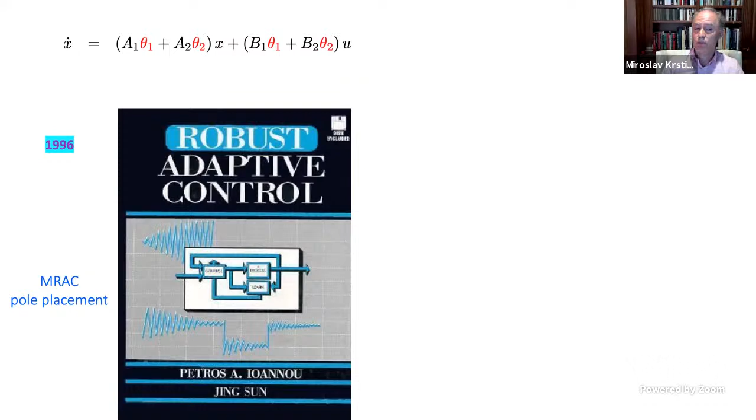Roughly, and I'm really simplifying things, for systems that are linear in X and linear also in the parameters theta. This book appeared in 1996, and roughly speaking, you will learn there methods like model reference adaptive control, pole placement, also adaptive LQR, and other methods.

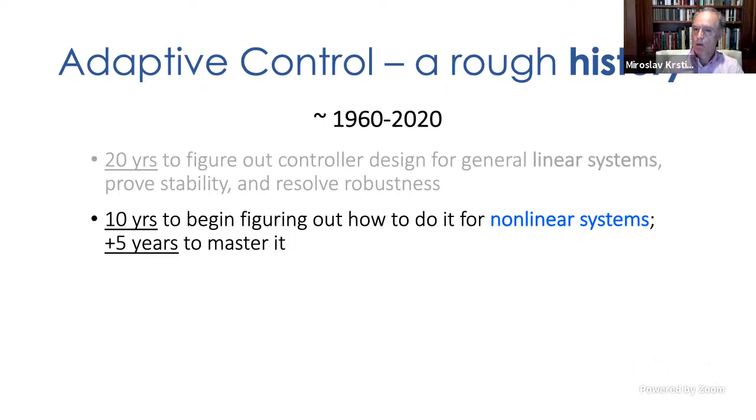The next 10 years, the 1980s, were spent figuring out how to do adaptive control for nonlinear systems. And the following 5 years, roughly the first half of the 1990s, was spent mastering adaptive control of nonlinear systems. That area was launched with this book.

And you see that the difference here is that while the system remains linear in the parameter, it is no longer linear in the state variable X. This book remains incredibly popular to this day with 11,000 citations. There's only one more highly cited research monograph in the control field, and that is Steve Boyd's LMI book.

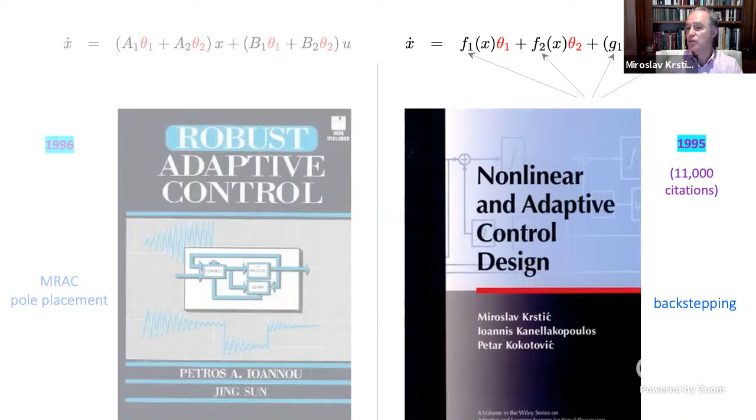The methods you get to learn from this book are methods related to backstepping. And then after this book, focus was placed on developing neural network versions of those methods, namely studying problems where the nonlinearities are not necessarily so simply linearly parameterized, but are more unstructured.

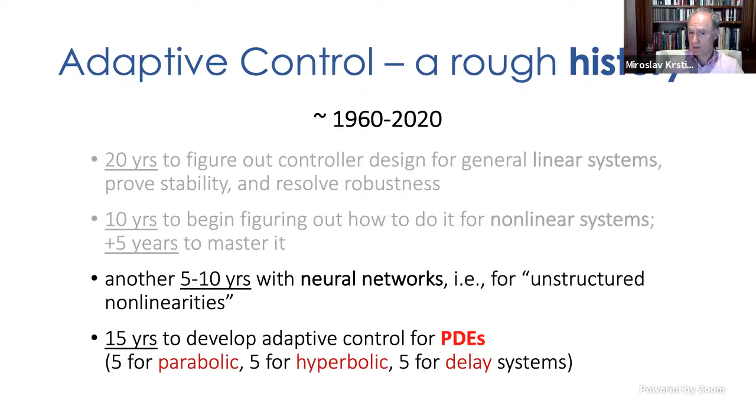Delay systems, by the way, are a hybrid class of infinite dimensional systems that includes transport, hyperbolic PDEs, and ordinary differential equations. There are many, many lessons that the adaptive control people have learned the hard way over the first 30 years and continue to struggle with over the subsequent 30 years. And I will emphasize 3 of them. Some of them are extremely basic, but still even from those, there is something to learn.

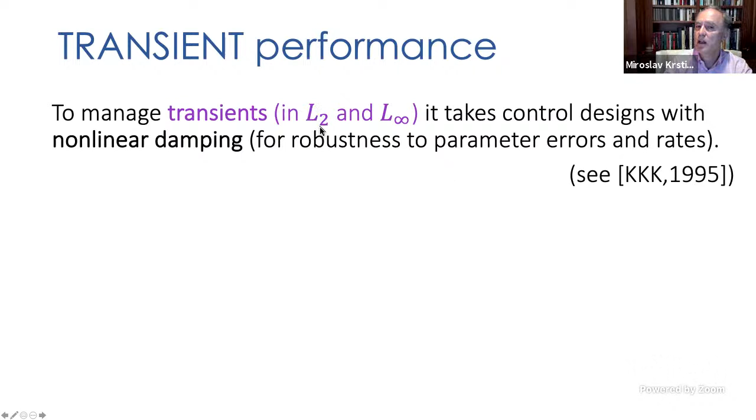You cannot achieve this with model reference adaptive control. You cannot achieve it with pole placement and so on. It's become achievable by the use essentially of nonlinear augmentations of the baseline controllers. And the first such results are in papers that precede this book that I mentioned earlier. So the transient guarantees come in the form of L2 and L-infinity bounds.

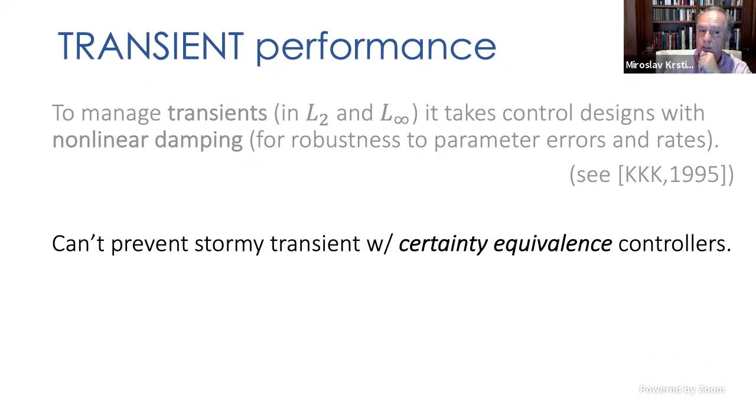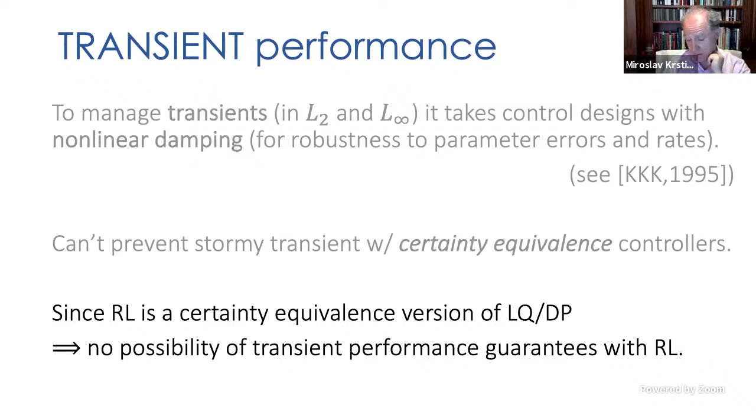Certainty equivalence controllers, namely just adaptive copies of classical non-adaptive controllers, cannot guarantee desirable adaptive transient performance. And since adaptive dynamic programming or reinforcement learning is a certainty equivalence version of LQR, there is no possibility of having such guarantees with those methods. Be prepared for a user to demand it, but that you will not be able to furnish.

Finally, optimality. So why is this relevant? Well, because adaptive dynamic programming is an asymptotically optimal learning approach. It is called adaptive dynamic programming. It is an adaptive form of optimal control. Sometimes when terminology includes two adjectives, people commute them. Adaptive optimal control, optimal adaptive control, who cares, right? Well, actually, there's a big difference.

The first phrase means that it's an optimal method that is made adaptive, and it's optimal asymptotically as time goes to infinity. Optimal adaptive control is an adaptive control method that is optimal over the entire time horizon. It is truly optimal from 0 to time infinity. Does such a method exist, since adaptive dynamic programming certainly is not that? Can the second thing, optimal adaptive control, be achieved?

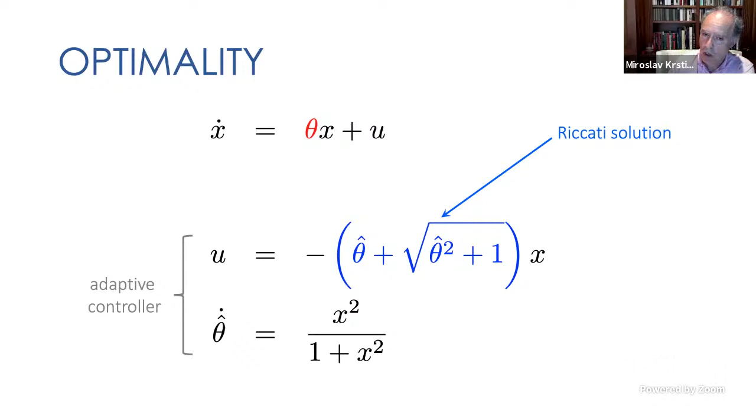Now here's a result that takes a little bit of proving. That control law happens to be the minimizer of this cost functional. Take a look at it. It's a bit unusual in two ways. First, the sum of the squares of the plant state and of the input are divided by this Riccati solution, which is fine because this quantity is positive. It's not constant, but it is positive. The second thing that is far more unusual is that there's a weight that is exponential in the parameter error.

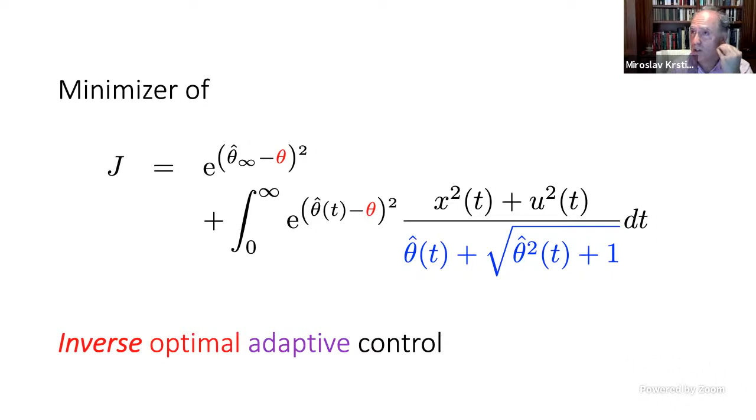Well, I will agree with you if you say that you want to be able to achieve optimality with respect to the cost function that you pick first. So is that possible? Is a direct optimal control, rather than inverse optimal control, possible? As of yet, it does not exist. And perhaps it should not even be sought.

Because even in this simple scalar case, here I'm giving you the value function. How would you define in an adaptive dynamic programming method that the value function should be of a form like this, that incorporates a dependency on the parameter estimation error, including the unknown parameter, so that that unknown parameter doesn't show up in the control law?

So there is certainly a problem, and maybe even a curse, not of optimality and not of dimensionality, but of adaptivity, something that simply does not appear in optimal control problems as conceived by Kalman, but in the adaptive versions of that.

Next, I want to show you a couple of applications of adaptive control in infinite dimension. First, adaptive control in infinite dimension caused by the presence of a large delay in a nonlinear system, which will happen to be a robotic manipulator. And second, an adaptive control in infinite dimension for a system modeled by a PDE, which will be a traffic system.

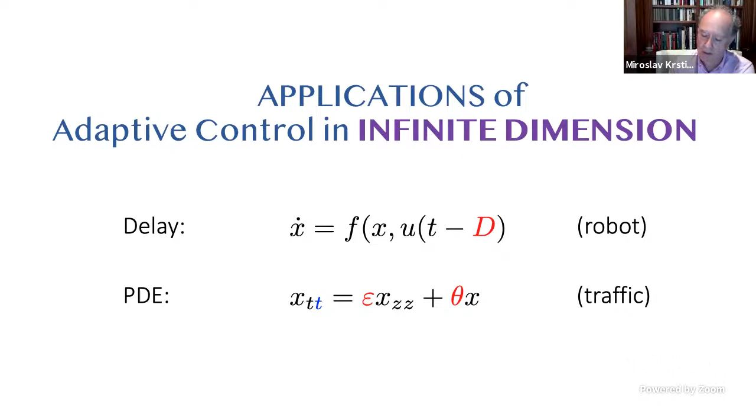So first, a robotic manipulator. This is the Baxter robot, 7 degrees of freedom. I will be showing you two movies. In the middle is going to be a movie of a successful performance of an adaptively controlled Baxter robot that performs a movement of an invisible object from here to a place here.

In the upper right corner, I will show you a movie of a robot that is subject to a large, significant enough delay that this robot fails. This delay is introduced to simulate Parkinson's disease. The upper right robot would act exactly as a human who is inflicted with Parkinson's disease, namely who has a delay in the neuromuscular feedback loop, would act. So here's the movie.

A lot is going on. Two movies running in parallel, plus there is going to be a plot of the delay estimate. So the robot in the middle will be governed by a feedback law that does two things. It estimates the delay and it compensates the delay. The basic controller is not just a nonlinear controller, but a nonlinear robotic controller endowed with a predictor feedback, a special kind of feedback that compensates a delay.

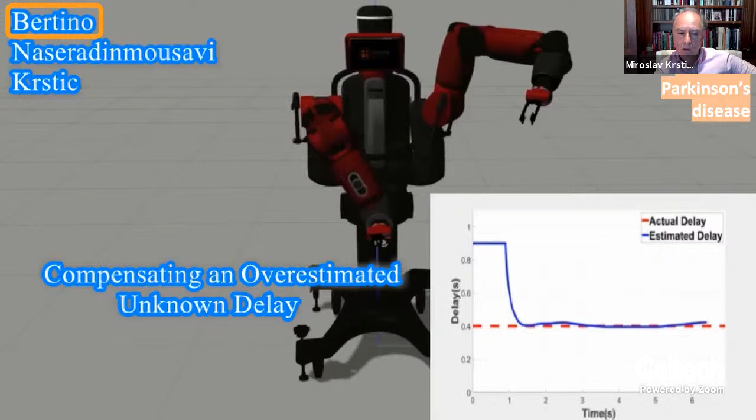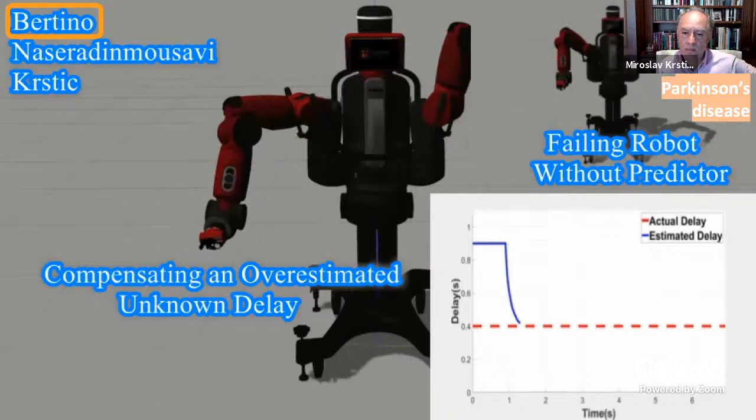So first, please concentrate on the upper right corner, how this poor Baxter struggles with a shaking due to the delay. Second, let's concentrate on... my PowerPoint is unresponsive, I apologize. Let's concentrate on the plot in the lower right corner. So you see the smooth motion of the robot, which employs the delay estimate, which converges to not exactly the true value of the delay, but close enough.

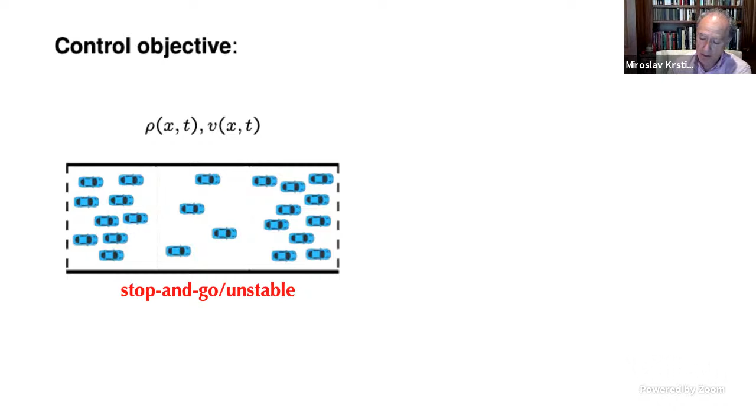All right, let me now, in the interest of time, move on to the next application. This next application is the suppression of the stop-and-go instability in road traffic. So you've all driven in traffic at around 25 miles per hour. For those who are from Europe, that's your second gear traffic. It's the most frustrating thing. You keep shifting between first and second gear, never fully stopped, but always on the verge of stopping. And when it's congested, you can't help it, but it would be preferable to travel slow but steady.

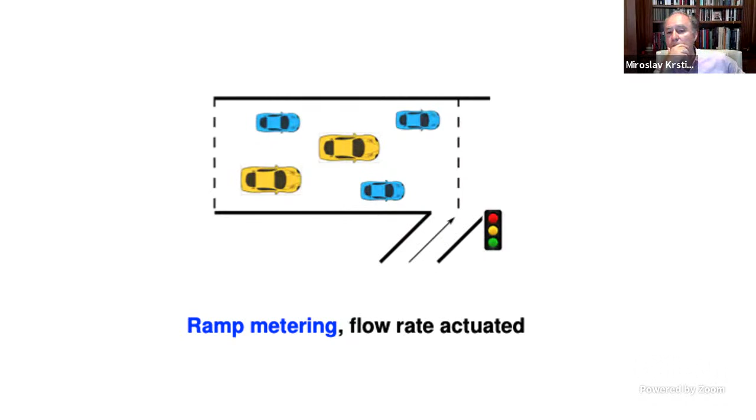And this is possible. And I'm not talking about connected autonomous vehicles. I'm talking about making this possible by using the interaction between cars. There is the behavioral interhuman interaction, or how humans react to the acceleration and the deceleration of the cars ahead of them. All of this chain of interactions can be influenced by a single traffic light, a single ramp metering that is letting cars at a desired rate on the road and influencing the upstream traffic.

The model of such traffic, there are various models, but the most elegant models, the cleanest models, are PDE models. The most basic model is a single PDE, which is not detailed enough for stop and go. It's a PDE modeling just the traffic density, and it can model congestion and shocks. But to get an instability and stop and go, you need a second PDE for the traffic speed. Too complicated to get into the details. Two coupled first order nonlinear hyperbolic PDEs.

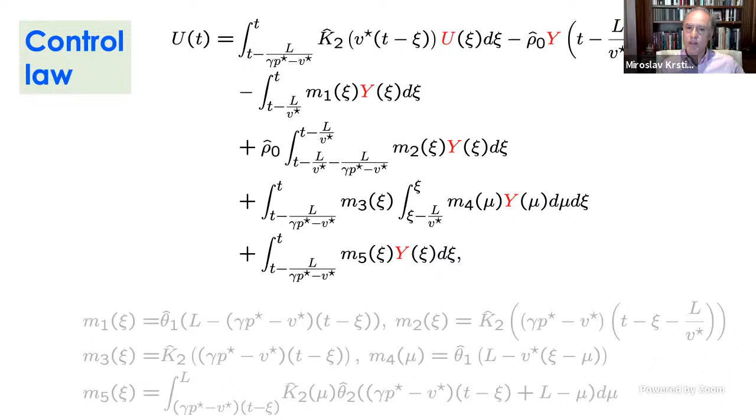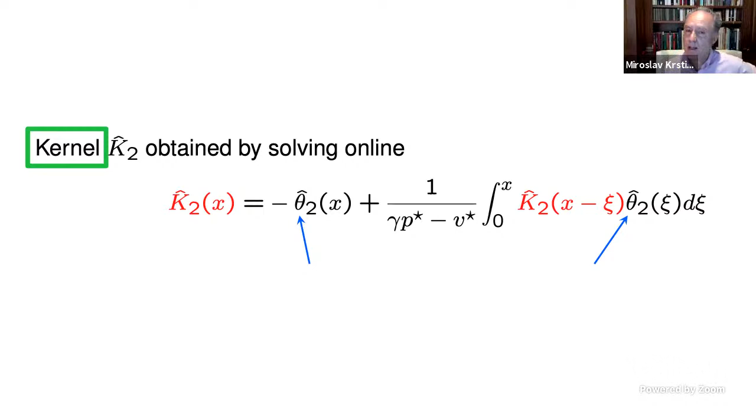The most important thing methodologically is not the many lines of expression on the previous slide, but this single line here. This is the result of the backstepping design. This integral equation for computing the control gain K2 hat adaptively in real time, based on the estimation in real time of the plant parameter theta2 hat. So theta2 hat is being estimated, being learned in real time, and K2 hat is being calculated. So K2 hat is, if you want to think in terms of optimal control, like the Riccati equation counterpart in the backstepping method.

2 things need to simultaneously be estimated: the unmeasured density and velocity state and the unknown parameters of this PDE. Plus, the control needs to be propagated all the way upstream from the ramp. So that's why it takes about 9 minutes. For the cars to drive at that speed, the 1 kilometer takes about 2 minutes. So that's just to get an idea of how long it takes. Not long at all. It's pretty quick.

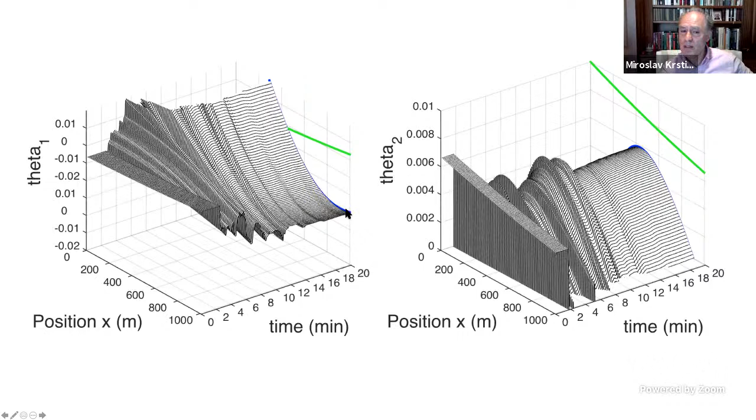I've said from the beginning, don't expect the parameter estimate to converge to the true value. The parameter estimate will converge to a value that is just good enough for the control to suppress the stop and go. So the true values of these distributed parameters, theta1 and theta2, are shown in green. The parameter estimate converges to something that looks totally unrelated to it.

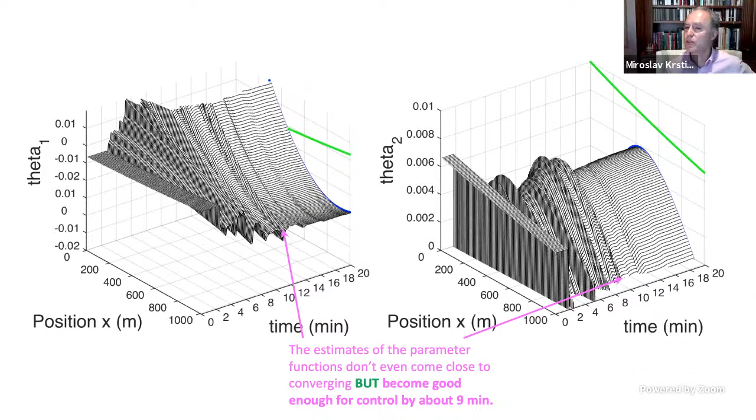And in 9 minutes, the stop and go has been suppressed, and there's no longer a reason, nor even an error to drive these parameter estimates further. If there is some disruption to traffic, then there will be further learning, and we'll go closer to the unknown parameter. Let's now take a look at reinforcement learning applied to the same problem. And this may be the most interesting part of my talk to the present audience.

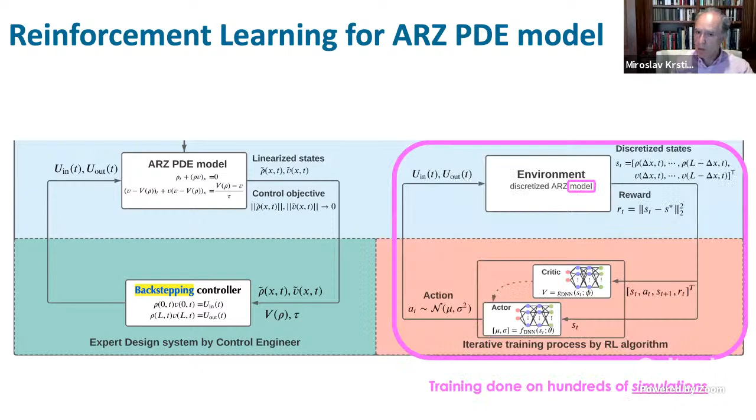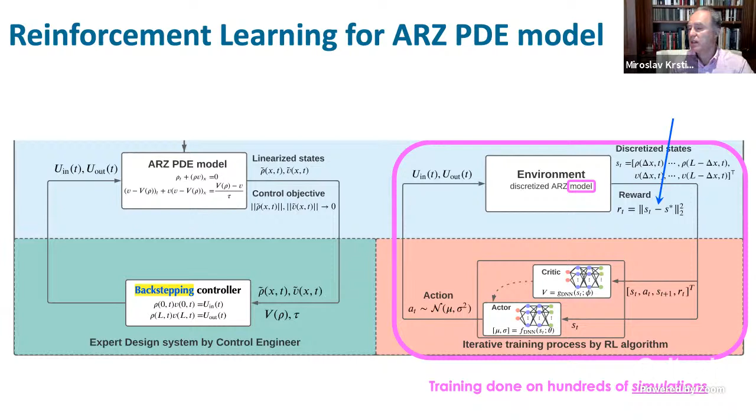So to summarize, on the left I've shown you the development of a backstepping method for the ARZ PDE model of traffic. What I will show you next is the development of a reinforcement learning effort for the same PDE model. It will be a simulation-based training with a reward function that is essentially the norm of the deviation of the density and the velocity states relative to their equilibrium values.

So here's how this goes. On the horizontal axis, I have time. So these are the experiments. On the vertical axis, I have this reward. The rewards converging to 0 means success. Let's start from k equal to 1, experiment 1. You see that the reward hasn't converged to 0. So the first trial obviously is not a great success.

By trial 100, things have interestingly gotten worse, and that probably doesn't surprise you. It's just not enough training to really master such a high-dimensional system. But by test 200, we've started to approach the performance of the backstepping design, which is shown in blue. And by step 800, we have gotten close enough.

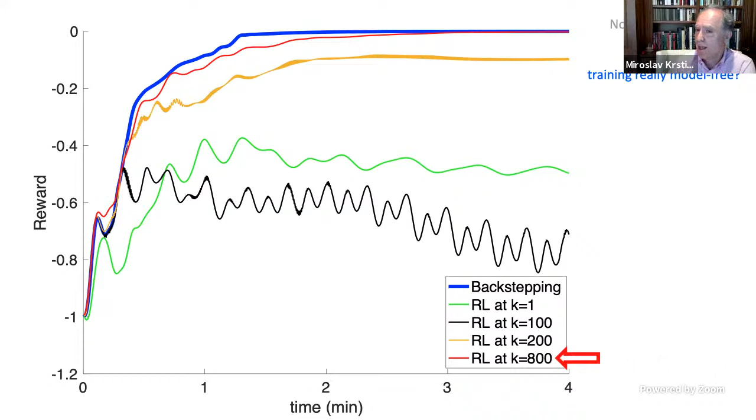Now, let me remind you, this is not real-time learning like what I showed you with adaptive backstepping. This is offline simulation-based learning. And one has to wonder, is simulation-based learning truly model-free? Because the model has been used for learning. The thing that disappoints me the most is that I can't do this learning in real traffic. I have to do it on the ARZ PDE model, because in real traffic there would be a massacre on the road.

How long would it take? Well, at this rate, 800 experiments, it would take a couple of weeks, day and night, to learn the backstepping feedback law. And finally, the controller will work well starting only from near the initial conditions used for training. The controllers have worked poorly starting from initial conditions reasonably far from the training set.

Still, I want really to give credit to reinforcement learning here. I think that it's remarkable that a user with zero background in PDEs, a user who hasn't even heard of a Sobolev space or an H1 norm or the Agmon inequality, can do this and recover the backstepping controller after enough simulations.

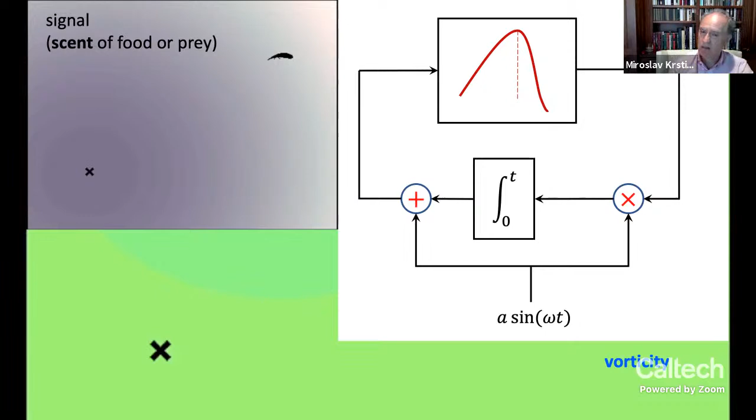The fish uses sinusoidal undulations of its body or its tail for propulsion. That's its means of locomotion in any direction. The fish is an animal, needs to eat, needs to seek a prey or some other food, has no GPS, gets hungry at night, sees nothing. How does it find its prey in such conditions? So here's a conjecture based on extremum seeking. So I will apply the algorithm from the diagram, and let's see how it does.

I'm starting with the fish oriented away from the prey, and the fish doesn't know which way the prey is. It simply will be guided with that algorithm connecting its single nostril to its tail. Oh, by the way, just to stop this, in the upper left corner, I'm showing the olfactory field. The scent is strong at the location of the prey and decays away. In the big area in green, I'm showing the mechanical field. These are the forces acting on the fish, in particular, vorticity.

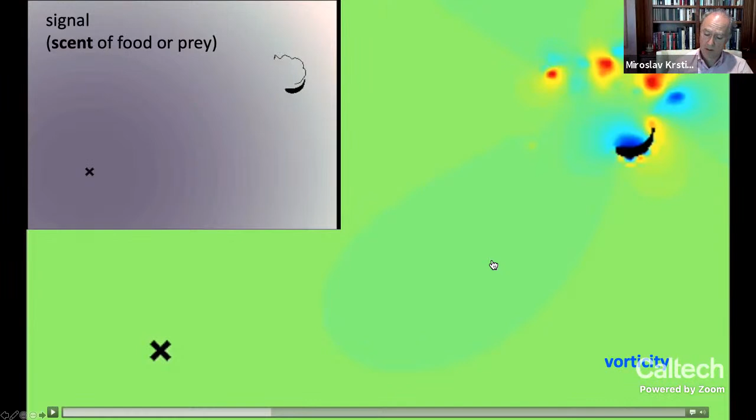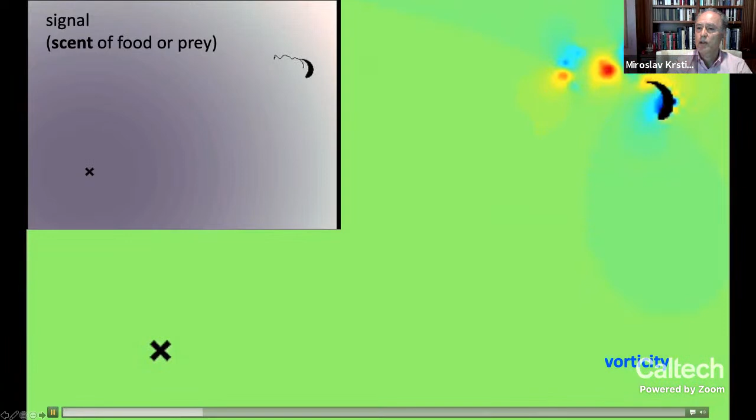All right, let me continue. So anyway, you see that the extremum seeking reorients the fish, and then after that, it's kind of done. I mean, it simply doesn't let the fish stray away. All right, so extremum seeking was invented in '22 and went dormant in the late 60s for some reasons.

Somebody showed it to me in the late 90s, and I was completely blown away by how much simpler it was than the methods I was showing you in that 1995 book on adaptive nonlinear control, how robust and effective it was, and how mysterious to me its stability was. And I just could not rest until I understood why it worked. And finally, I managed to reach the understanding, and this result was published in 2000.

I didn't expect the torrent of activities that followed. More theory, numerous applications, impossible to keep up. Over 1,000 papers per year. Fortunately, I'm not being asked to review each of those papers, and I'm aware of a fraction of what's being produced. The first book on this was this 2003 book, which introduces the basics of periodic or sinusoidal based extremum seeking. And about 10 years ago, motivated by E. coli chemotaxis, we developed a stochastic version of extremum seeking with Shujun Liu, and this book contains that.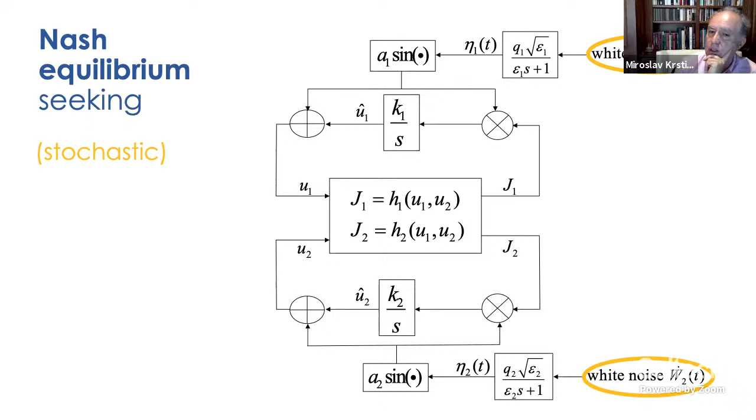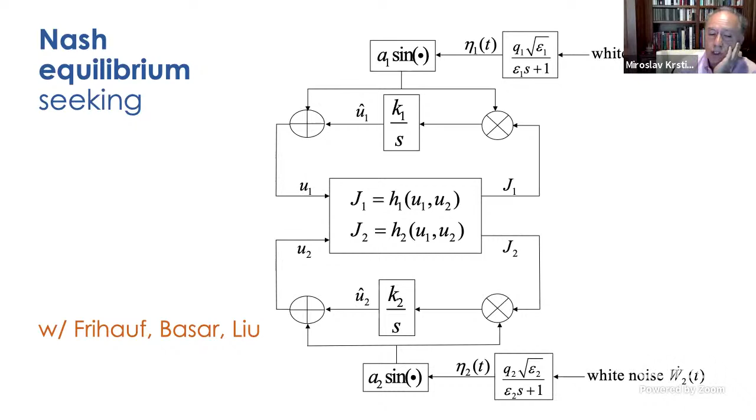So here is a non-cooperative game, a duopoly with two players, formulated as not a periodic, but a stochastic extremum seeking game. So you see the white noise being employed instead of sinusoids. This is work that was developed first deterministically with Paul Frihauf, and then stochastically with Shujun Liu, and in both collaborations with Tamer Başar.

The algorithms that both agents employ are completely model-free. They're exactly the same as the first algorithm I showed you. They're not even aware that they are engaged in a game. They simply use an algorithm. They simply use an integrator, addition, multiplication, and a perturbation signal, be it a sinusoid or white noise. So completely model-free.

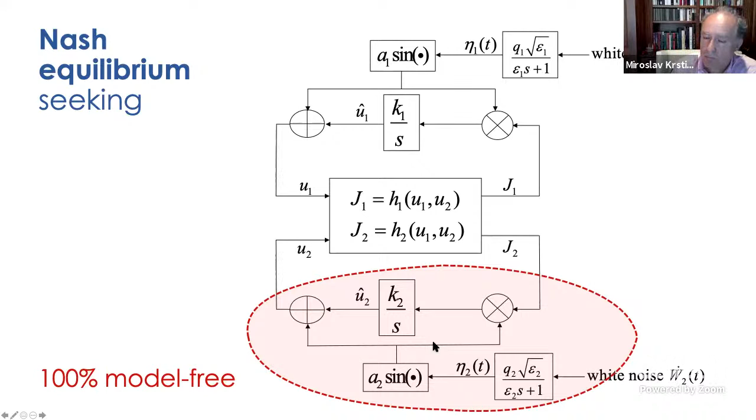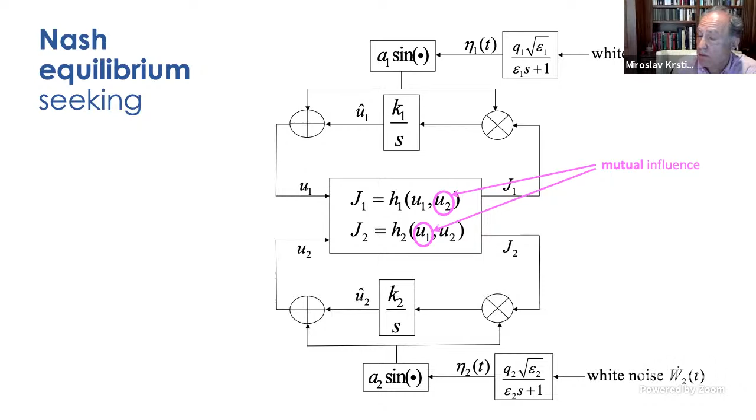But the optimization problem is a non-cooperative game. There is a mutual influence. However, these players are not trying to learn it. They're not even aware that they're solving a game. They're not trying to learn the payoff functions, not even their own, let alone the opponents'. All they're trying to essentially learn are their Nash equilibria, their optimal strategies.

And what we can prove is the following. We had to develop a new form of stochastic averaging in order to be able to establish results like this. So we can establish exponential or weak exponential stability results of those Nash equilibria with probability 1, modulo some residual value, which depends on the intensity of the injected noise.

So bottom line, extremum seeking magically finds the Nash equilibrium of a game in a completely model-free fashion. Let me now show you, for the remainder of my talk, 3 extremum seeking applications.

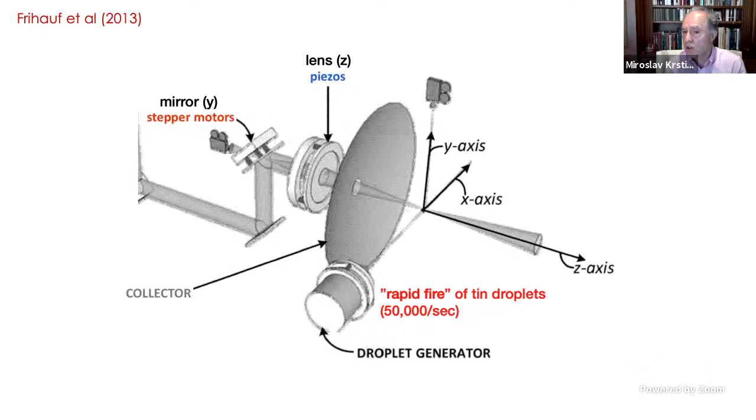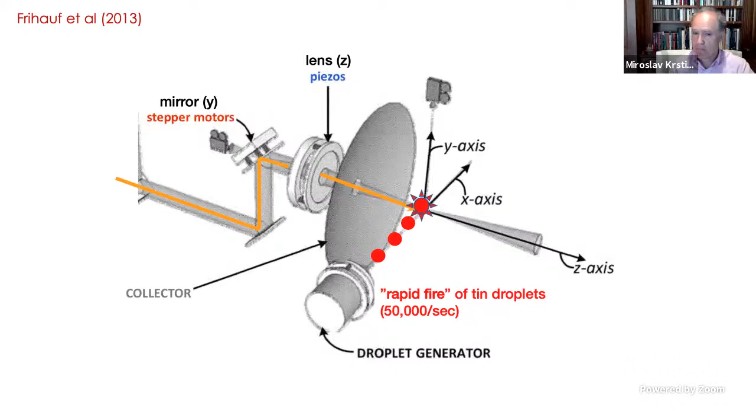This droplet generator produces a rapid fire of tin droplets at 50,000, by now maybe already 80,000 droplets per second. Remember, you can't hear above 20 kilohertz. So this is such a rapid fire that that's even inaudible. That's how fast it is. So these droplets travel, and each droplet is being targeted by a laser pulse, and it needs to hit it. Once it blasts it, light gets emitted. So you have two rapid fires that you need to hit bullseyes 50,000 times per second.

Now look at the light wavelengths. The laser wavelength is 250 nanometers. The wavelength of the extreme ultraviolet light is 14 nanometers. So a factor of more than 10. So this transformation of wavelength results in a density increase of 200 times. Where is extremum seeking in all of this?

They couldn't get this to work without applying extremum seeking to tune the positions of the mirror and the lens. With all other methods, it would work in the morning, it would no longer work by lunchtime. And they realized that it's not about using better cameras, it's not about modeling the fluid dynamics of droplets, it's simply about maximizing the light intensity. So extremum seeking solved the problem.

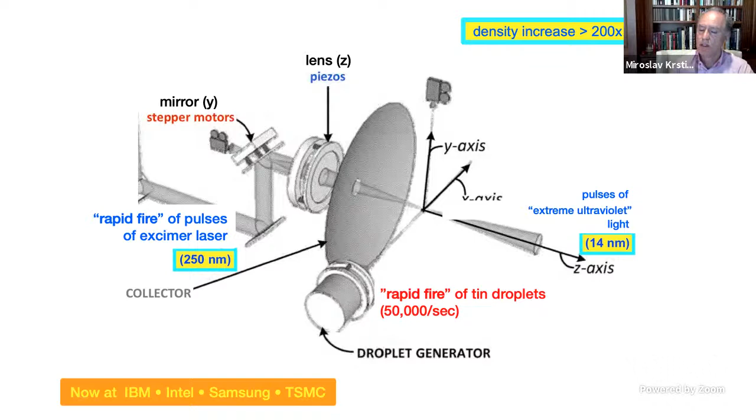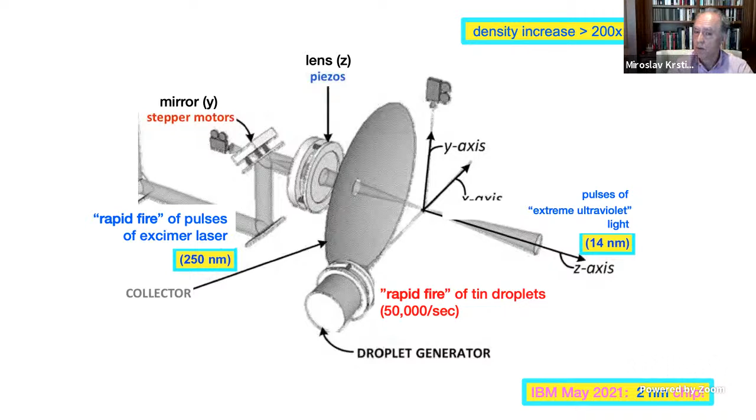So this was in 2013, and at this moment, all of the major companies, IBM, Intel, Samsung, TSMC, have this technology, billions and billions of dollars in savings and in profit for the companies. And just a month ago, IBM announced that they've gotten to 2 nanometer chips. So that's a density increase relative to what used to be the case 10, 12 years ago on the order of 10 to the 4th. Remember, the point is that this process constantly changes. Learning can never stop. It cannot be done just once.

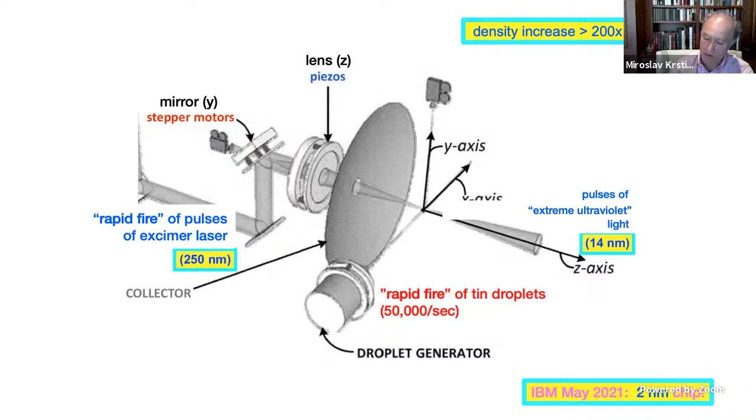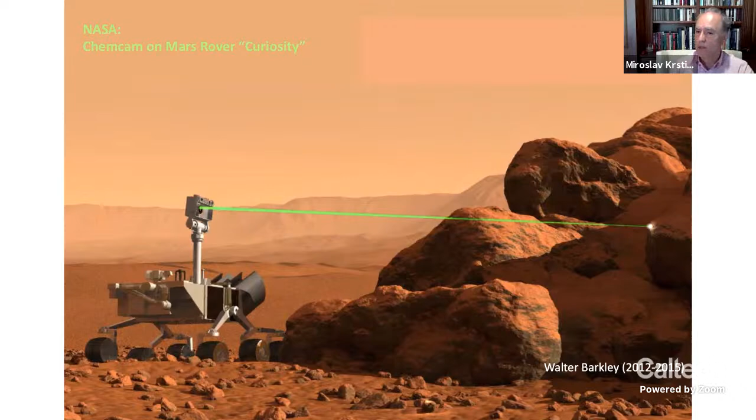Not dissimilar to this is the application done roughly at the same time when NASA's ChemCam camera on the Mars rover, its algorithm for autofocus wasn't working. This is a camera that performs the testing of the chemical composition of rocks on Mars. And once they uploaded the extremum seeking algorithm, which my student facilitated, this instrument worked vastly better, and an indication was found of the presence of water on Mars.

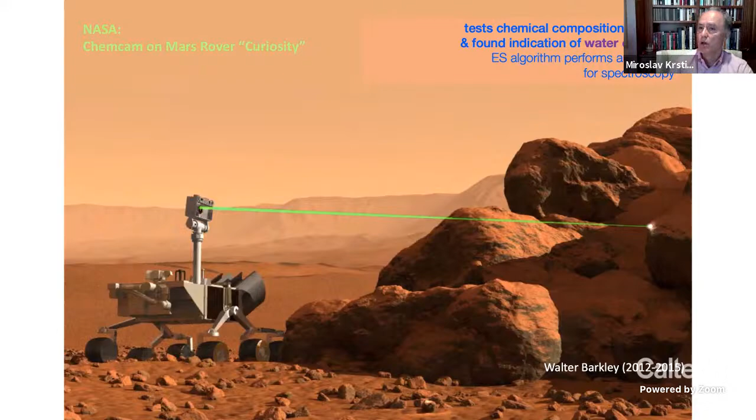Finally, maybe the most exciting to me currently application is the following. I'm going to get us back to the first application I showed you with fish. But instead of a fish, we're going to look at sperm, a single sperm cell seeking an egg, or at least swimming in a field of a chemoattractant like emitted by egg.

So this is related to extremum seeking in the sense that a few years ago, an algorithm was published by four of us here, which is quite unusual and exploits the presence of trigonometric nonlinearities in the unicycle model so that the periodicity is not injected, but simply by using a bias in the angular velocity omega and feeding as feedback the rate of the measured concentration, you perform extremum seeking by generating trajectories that are circles that drift towards the source.

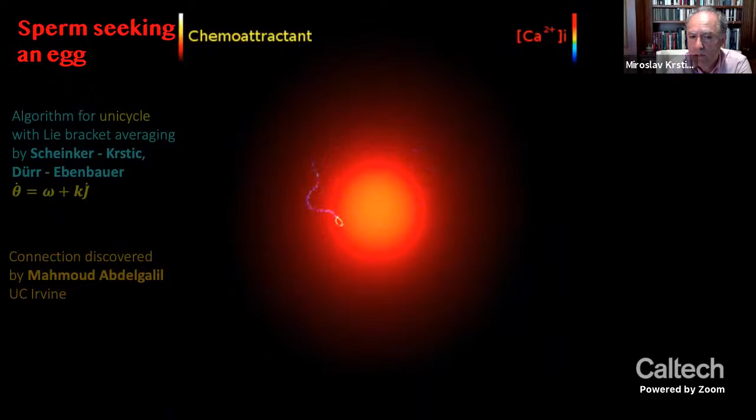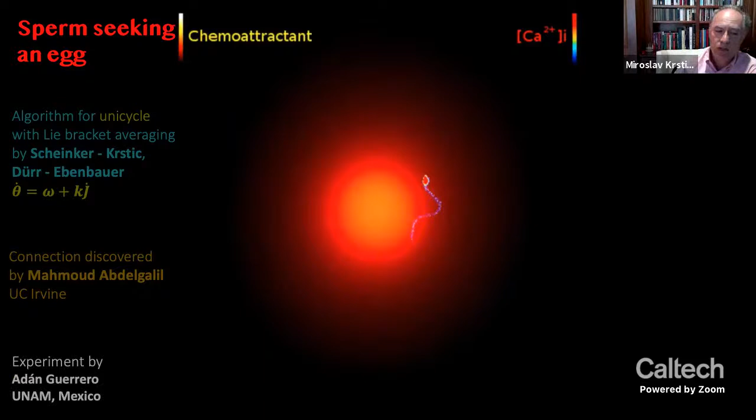Let me show you what sperm does. So this is exactly what the unicycle does as well when applied in the paper that I mentioned earlier. So that is the sperm's seeking of the concentration of the chemoattractant, and this experimental movie is the result of the work of Adan Guerrero from UNAM in Mexico.

So I'm at the end of my talk, and I want to wrap it up with three very brief messages. You saw that a lot of what I did was for continuous time systems, PDEs, and so on. So don't convert everything to discrete time and finite dimension. Try to, if possible, operate in the native domain of systems, especially if it's physics where the systems reside. Second, don't limit yourself to solving systems by optimality. There are many other ways that get you to the result more easily and just as well.

And finally, when it comes to learning, this is maybe the most important thing. It's something that not only may have to be redone, but typically will have to be done over and over in a realistic system. So thank you.